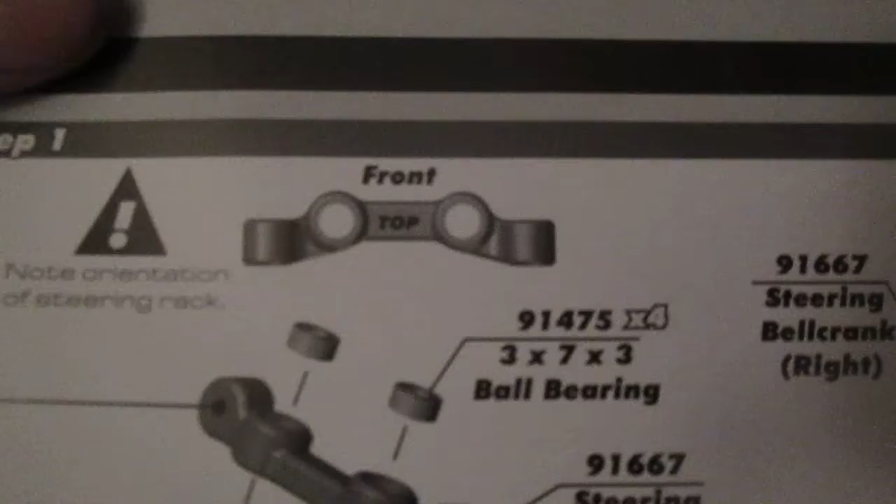The front shock tower, the front A-arms, the steering bell crank, and the top plate - doesn't seem like a lot, but it took about 3 to 4 hours. It's pretty complicated, and there are some parts in the book that aren't really described well. For a beginner who's never done it before, you really got to pay attention to what's going on in the book.

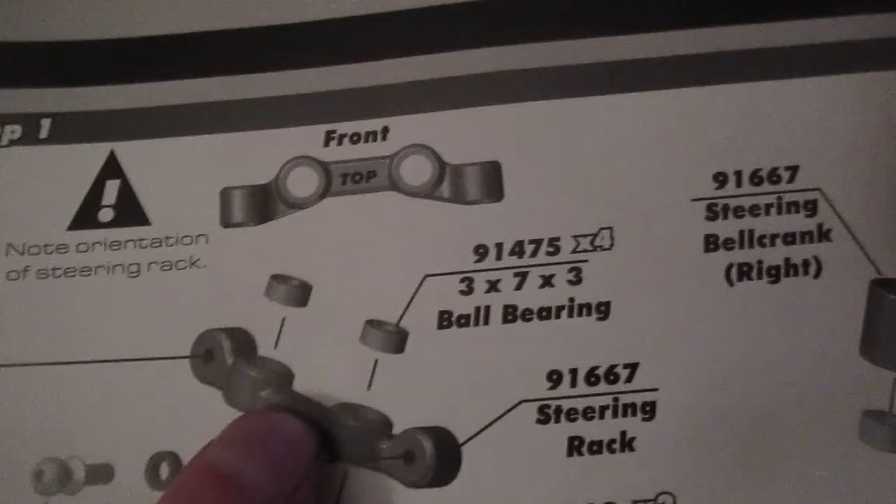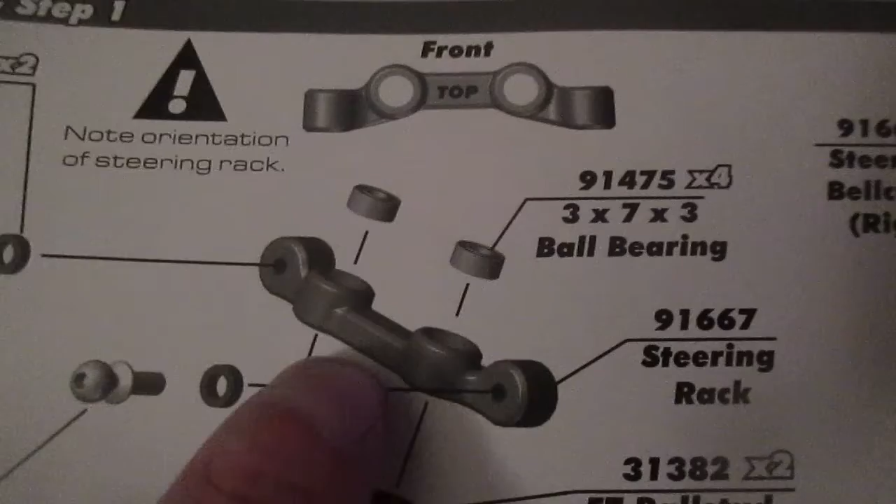You really got to take a look at some of the finished pictures here. If you look up here, there's spots on the bell crank, the steering rack, where it says there's a part labeled on top that says 'top', and it says 'front', but when you come over here, you can't really see whether it says top right there or not.

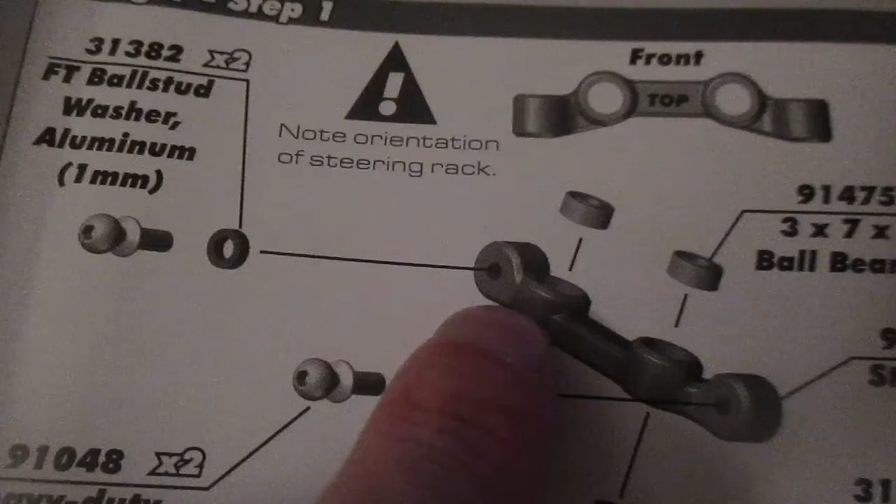So you really got to pay attention. How I figured it out is if you look here, you can tell the spot that the ball stud screws into looks like it's kind of set back rather than up forward. If you come down, let's see - I'll try to find it because there's a spot on here.

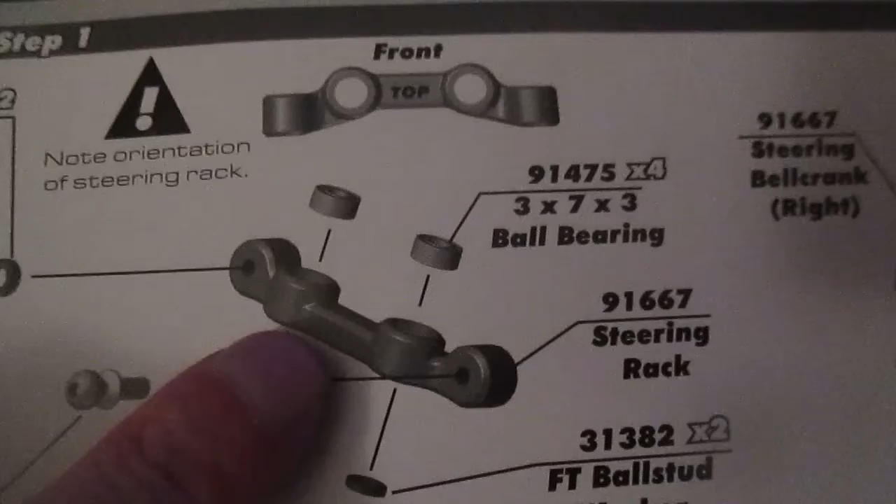Okay, I can't find it right now at the moment. But this part gave me a bit of an issue with the way it sits - it's got little warnings in here that say note the orientation of the steering rack. You really got to pay attention to the way it goes, or else it doesn't fit right and things don't work right. This gave me a bit of an issue - probably took me 30 minutes to really look at that and figure out how it was mounted up. But I ended up getting it done, and it's done right.

So you can see that was bag 1, step 1 - there was the steering rack, the arms and whatnot, and we got through bag 1. Step 2, we opened bag 2, which starts mounting the steering rack and the chassis rails, and this little piece here - I can't think of the name right off the bat.

You got to pay attention to these little deals - there's 2 different settings on there, and I'm keeping it with the kit setting, which is 25 degrees rather than 30 degrees. However, in the future, if I need to swap that, I will.

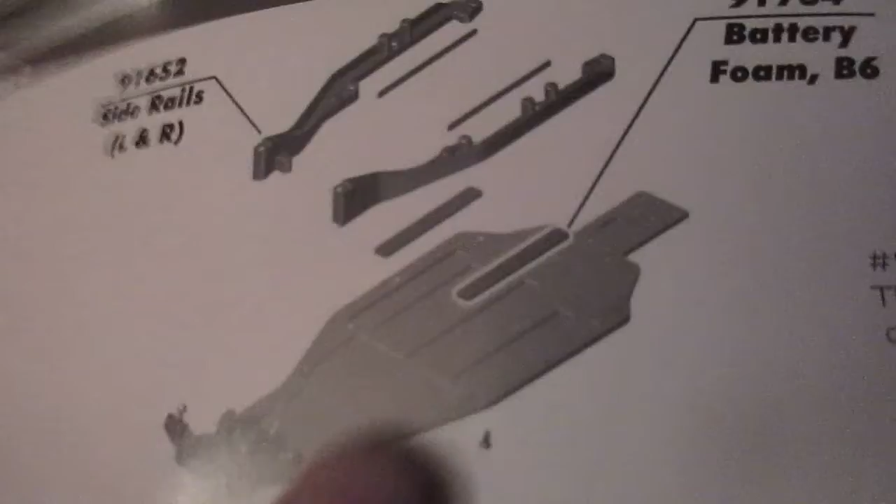Come over here, and this says bag 2, step 2, where you do the chassis rails and the foam. I didn't put the foams in yet - that's something I'll get to later down the road. I do have a battery and all the electronics for this car.

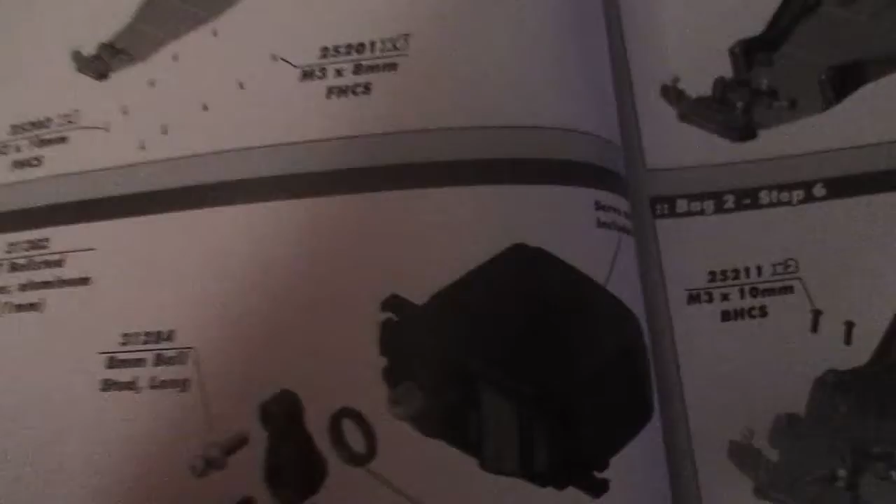Last night I didn't get a chance - my steering servo, which is actually part of bag 2 here, I didn't get a chance to mount. The steering servo that I'm going to use for the buggy is actually in my short course truck.

So pop that off there - I'm going to use this Protek servo. This is a $100 steering servo. So I'm going to take the steering servo out of the short course truck and put it into the buggy because it's a really fast servo.

Other than that, all the electronics in the short course truck are going to stay in the short course truck, other than the lap counter - I'll swap those between the buggy and the short course. So I'm thinking what I'll do is take the steering servo out of the short course truck, take the steering servo out of the Rustler that I have here - see my Rustler?

I'm going to take this - it has a Savox servo in it. So I'll take the Savox servo out of the Rustler, put that into the short course truck, and then put the $100 Protek servo that I have in the short course truck into the buggy, because that's part of bag 2, and I didn't get to it last night because I didn't have the steering servo with me. That's why the steering servo isn't in the buggy.

So tonight, tomorrow, I'll start building on the buggy again, and we're going to go right into step 5, bag 2. We're still working with the steering servo. So tonight we got plumbed through bag 2 - we'll just say that.

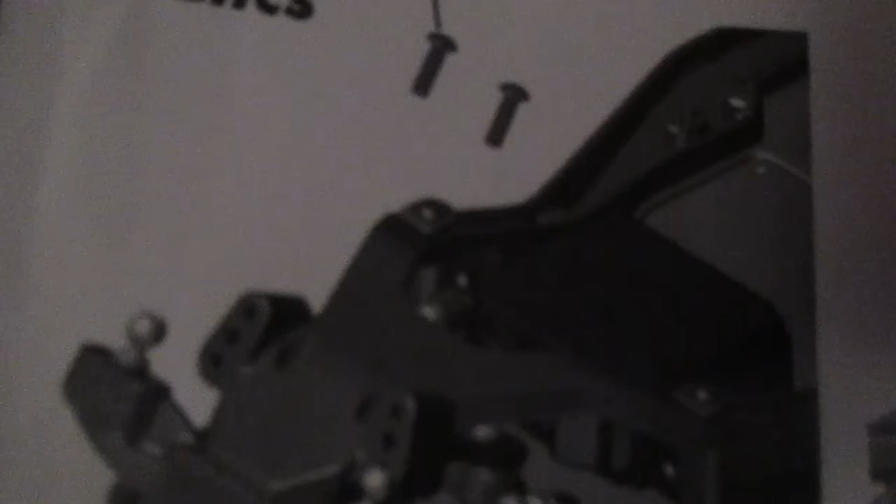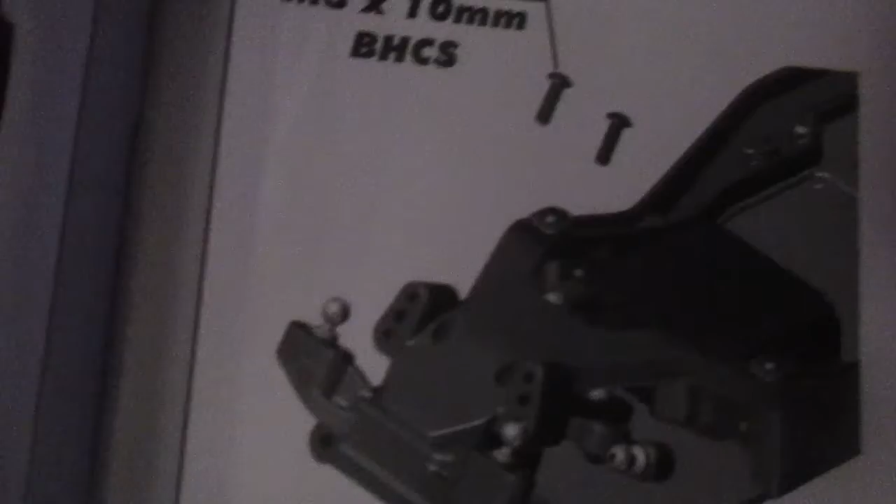You can see here where it shows mounting the top plate, and things like this right here where you see these 2 bolts coming down - you got to really pay attention. It doesn't really point, but if you look real close right there, there's little indentions, and that's where those 2 screws go. Things like that, where it's got a line right here, they should have made a line, in my opinion, to those little holes so you could tell exactly where those things go.

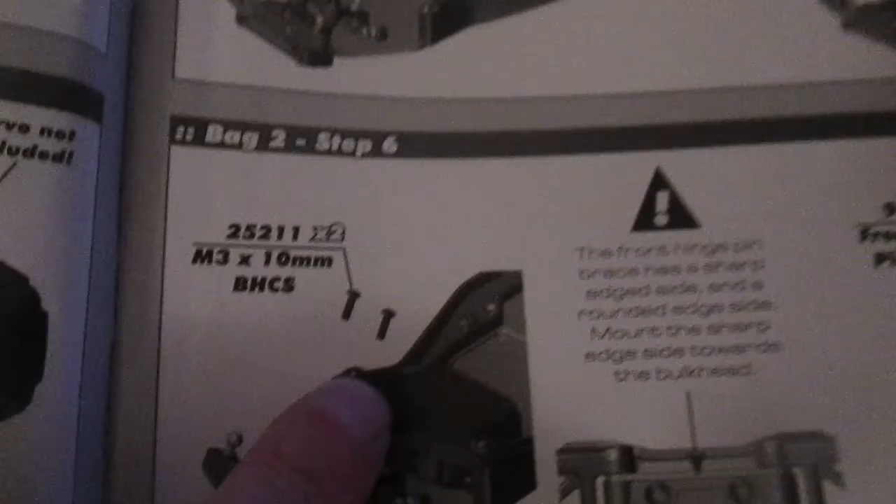One of the other things - I have a digital micrometer. So if you're going to buy a kit car, I would suggest you get a micrometer, because these screws are mixed in the bags.

So you see where it says 3 by 10 millimeters? If I didn't have a micrometer, there would be no way I could tell these screws were 10 millimeter versus 8 millimeter or not. So if you're going to build a kit car, I recommend getting a micrometer.

If you look here, all these different size nuts and bolts, or screws I guess you could say, are in this kit and they're mixed. So without a digital micrometer, you really couldn't tell the difference between 8 millimeters and 10 millimeters. And that's one thing I haven't seen in unboxings on the internet. So for somebody building a kit car, buy a micrometer. You can get them on eBay for $10, and they're well worth the money.

So that's pretty much it for little things I'd point out that you wouldn't really notice. Here's some things that are really good about the kit. It gives you little notes right here, like the front hinge pin brace has a sharp edge and a rounded edge.

And it does, if you really pay attention. It's kind of like a little chrome piece on there. Let me see if I can see it from over here. You really can't see it because the bumper covers it. Well, you kind of can—see right there, there's a little chrome piece on the inside of the A-arm. That's what they're talking about.

The other thing to note, you see here on the bottom, those two there and those two there, and then these three down—those are also different lengths, and it doesn't tell you what screw is what. If you look on paper, it says 3 by 10 millimeter for those 4 screws, but if you look at these, they're 3 by 8s. So looking in the bag when you have 10 or 15 screws that are only 2 millimeters different, you can't tell that apart.

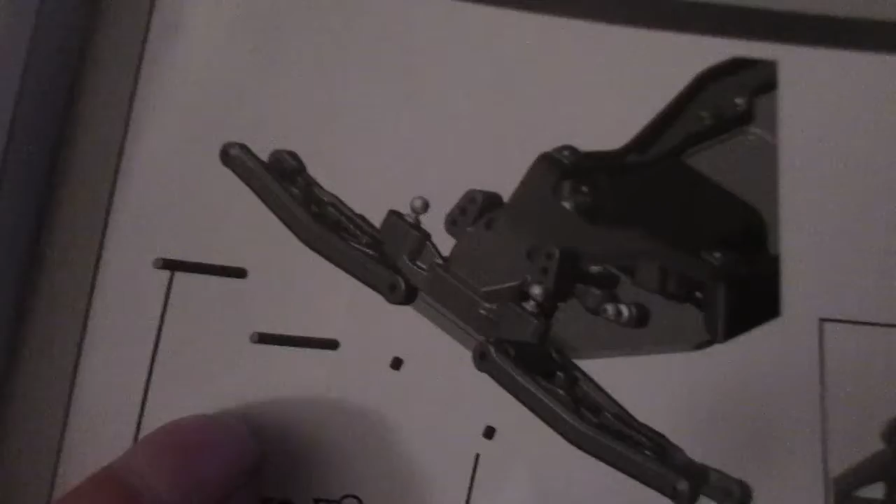Other little things I noticed took me a little while to figure out. These 2 screws here, this one 3 by 4, sit in the back of the A-arm, and what they do is hold the hinge pin from sliding in or out. That's something else to note, but they don't show you clearly—if you look up here it doesn't point to where those screws go. I mean, it kind of does on the inside, but the screw actually goes in from the outside.

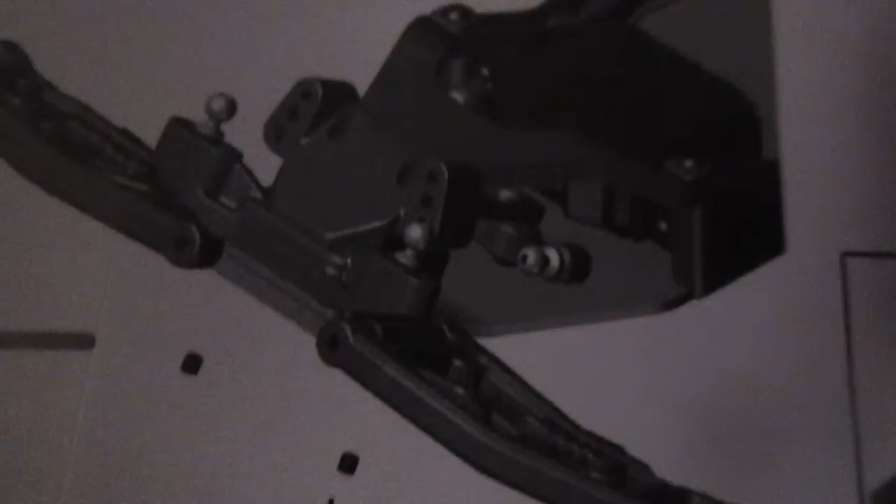So you just got to pay attention to it. It's kind of weird—those hold the hinge pins from sliding out, but then down here you have set screws. I'm not totally sure, but the set screws let you adjust how fast the arm falls. Like if you look at my arms, I've got one that falls a little faster than the other. See, if I hold it upside down, that one's already down and this one's slowly going. So that's something I'll have to adjust with the set screws to make sure it's right.

But I just wanted to do another update today because I said I'm going to do updates through my build. So that's where I'm at.

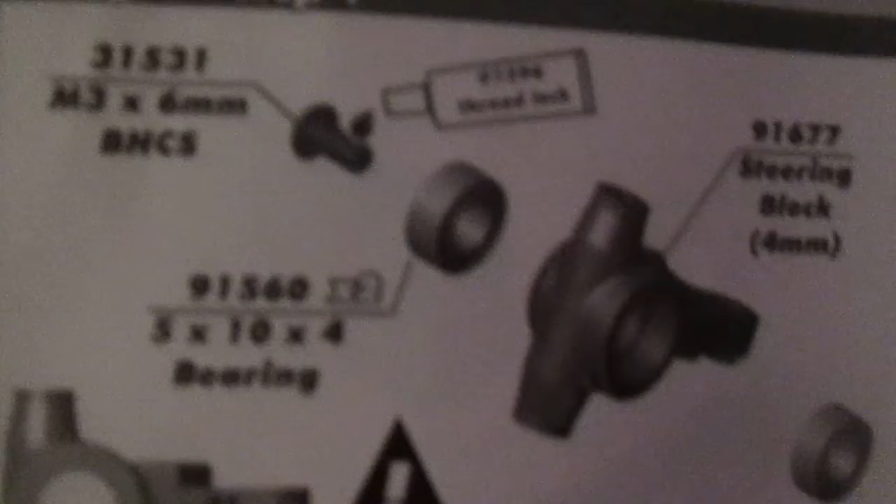So tomorrow we're going to be on bag 3, step 1. And it looks like front hubs or rear hubs, I can't really tell. I do have an aftermarket set of hubs going on this car that are $40, aluminum blue hubs, so I'm going to replace those right off the bat.

So I think that's it for this video. I just wanted to show the little problems I had with the build and things like that. Also, I do have all my electronics and stuff, but I'm not going to hint at anything I got because it's good stuff—I'll put that in another video when I start putting it in. So that's it.

Everybody's good. And my little pit stand, I never did a video on that—a little thing I bought on eBay for like $10. It's all aluminum, it's got a little measuring deal on the bottom, maybe some holes you can put shocks in or something like that. I don't know, but that's it guys.

A little update of how far I got last night and all the things I still got to do. One thing to note, I am going to keep my short course truck complete—this thing is running a 13.5, so this car is going to stay complete so I can have 2 full race buggies, or race truck, so...

And the Rustler is also complete. It runs—I'm just going to put the stock servo back into it.

So well, that's pretty much it guys, that's my update of my buggy and what I got done in about 4 hours of work. So yep, I'll do another update when I get a little further into it.